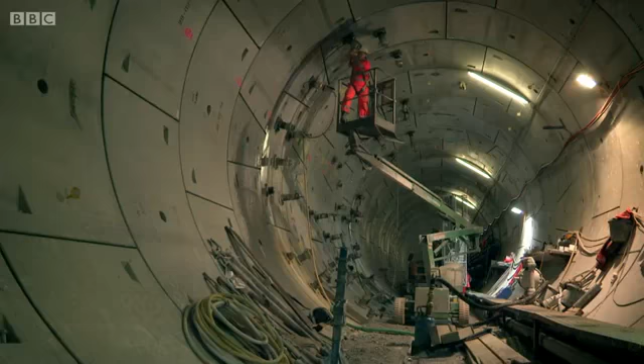Underneath the streets of London, an army of more than 10,000 engineers is building a brand new subterranean railway. Okay. Crossrail. We've done the maths, we've checked the maths, and we've checked them a third time. Costing almost £15 billion, it's one of the most ambitious rail projects in Britain since the time of Brunel.

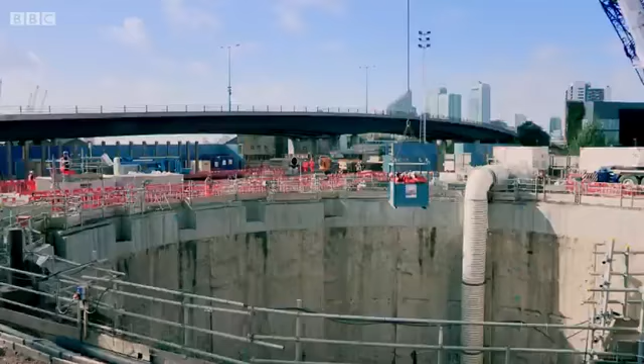I've been doing civil engineering for 35 or so years. Even I can't appreciate the scale until I come down here. Head him up. It was a lot easier when I was about 5 years young and 2 stone lighter. This is a crucial stage of the project for workers digging 42 kilometres of tunnels. We only get one chance to build this tunnel, so we have to get it right.

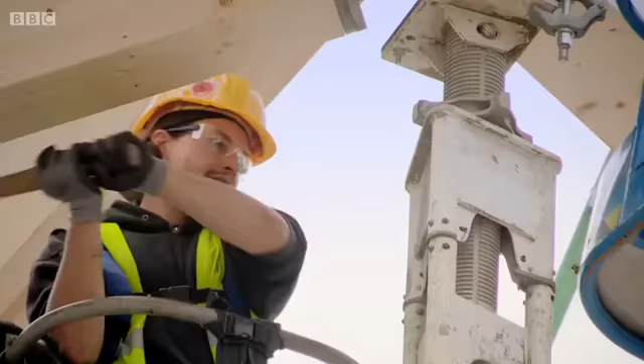When you do these things, you're building a part of history, you know, it's going to be here for a couple of 100 years. And constructing 10 vast new stations. I've never built a train station before, never mind one in a dock underwater. For almost 2 years, cameras have been following crews, working cheek by jowl with some of London's most distinguished residents. Bus ready to start pumping?

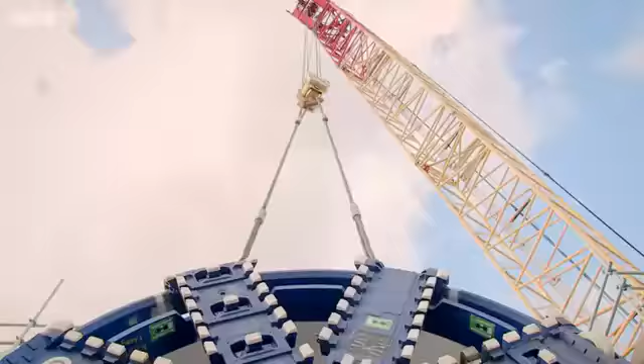Facing a constant battle to keep London moving. This area is where the gridlock is. Haven't been able to go up and down these streets for 4 years. Is Crossrail essential? Be wonderful when it's done. Constructing Crossrail is like undertaking open heart surgery on a patient whilst that patient is awake. This is the exclusive inside story of the epic endeavour to build London's new Underground.

London, home to more than 8 million people. The key to keeping everyone moving, the Tube. A vast network of 270 stations and 250 miles of track. The London Underground handles more than 1 billion journeys a year. All you've got to do is go on the Underground system in the morning and you can see it's very crowded. The forecast for London is one of continued growth, an extra 1 million more people in the next 10 or 15 years.

This 150-year-old network struggles to cope with peak demand. The last new tube, the Jubilee line, was opened 35 years ago. So today, engineers are building a brand new underground railway line to help take the strain. Passing right across London, it's called Crossrail. It will run overground, from Reading and Heathrow in the west,

straight underneath central London. It will connect key mainline train stations with the historic Square Mile and the new business district, before terminating at Shenfield and Abbey Wood in the east. 120 kilometres of railway will link to the rest of the Tube and open in 2018. Heathrow, Europe's busiest airport, will be just 28 minutes from London's West End, a journey that currently takes almost an hour on the Tube. Another 8 minutes will whisk you to the booming East End.

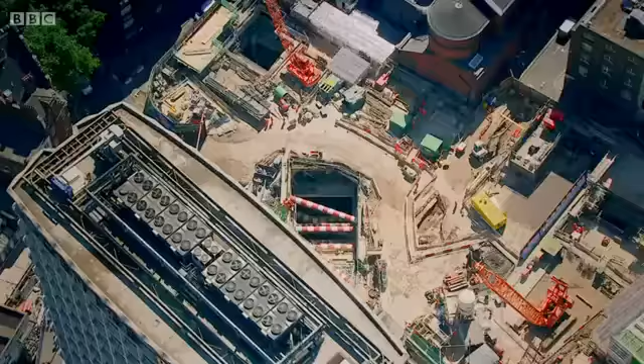An idea born in 1974, it's taken 40 years to get to this point. And the project isn't without controversy. It is a big job, probably the biggest single rail project that the UK's ever seen. Pretty much everything we do has an impact on somebody. The budget for Crossrail is 14.8 billion. This is taxpayers' money. It's important to remember that. And the other thing I've got to sign here is a £21 million payment authorisation to one of our tunnelling contractors. And this one's okay.

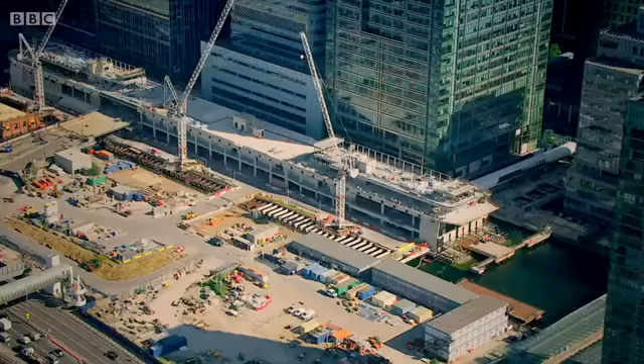Building Crossrail in the middle of nowhere would be a big enough technical challenge, but to do that right in the centre of London with all of the neighbours above us and around us makes it more complex still. Oxford Street, the shopping mecca that runs through the heart of London, between Marble Arch and Tottenham Court Road. It's the busiest shopping street in Europe. 200 million people visit the high-end stores here each year.

Engineers must dig the tunnels for Crossrail right underneath this area. The new train line will soon make it easier for people to travel here. But building the tunnels below ground without disrupting the stores and shoppers above is no simple task. Even for tunnel construction manager Steve Parker. Hey Mario. Who has more than 25 years tunnelling experience. Oh well, another glorious day at work.

A lot of people will say that tunnelling is boring. If you look up in the Yellow Pages boring, it says see civil engineers. I am a civil engineer. Steve is part of a 500-strong team. And this is the great picture at the Royal Oak Portal. And there's our tunnelling team. A few Hollywood players in there, yes.

Willie, where are you on this? Come on. There you are. Oh, he's right in the middle. That's Willie Archibald, our tunnel surveyor. And he's got a certain height, and we use that as a unit of measure. 1 Willie Archibald is a standard tunnelling unit of measure. We've got the Willie hat here from the Where's Wally thing, and we move that around from time to time.

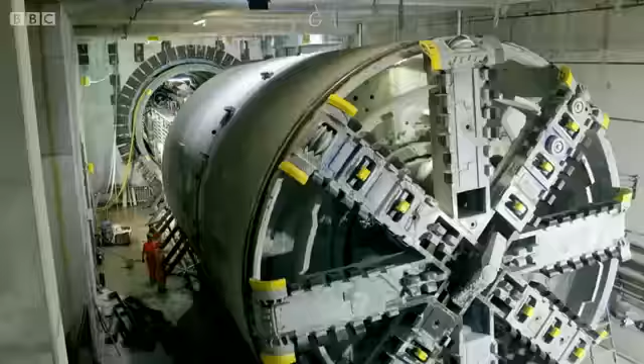Steve, Willie and the team oversee the running of 2 giant tunnel boring machines, TBMs. In all, there are 8 of these clay-eating monsters. Each one is 150 meters long and weighs 1,000 tons. These digging demons can burrow up to 72 meters a day.

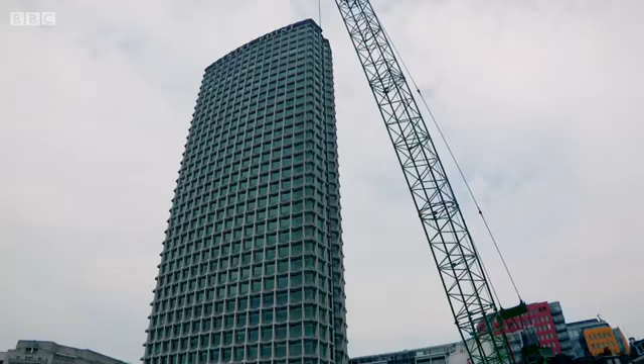And in the future, I want to be taking my family in this tunnel and say, look, I worked on this. I think many tunnellers like to think of themselves as kind of the unsung heroes because it's all underground. Steve's crew is about to face its toughest test yet. They must weave one of the tunnelling machines through the tightest point of the entire route, known as the Eye of the Needle.

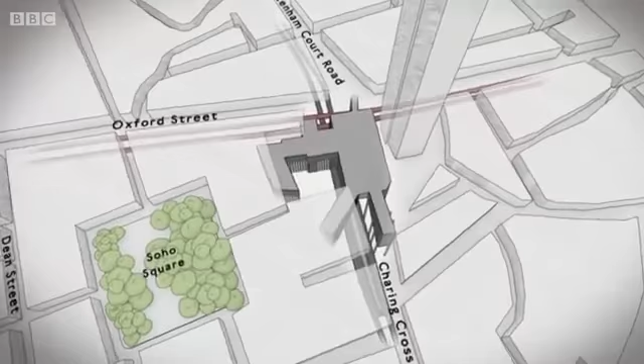At the east end of Oxford Street lies London Underground's Tottenham Court Road station. It's where the Tube's Northern Line and Central Line intersect. Crossrail needs to link into this super hub. But digging tunnels here is not easy. Pipes, cables and sewers crowd the ground. The Tube's busy Northern Line platforms and 2 escalators make the earth extremely crowded.

The only option for Steve's team is to drive their tunnelling machine through the tightest of gaps, 85 centimetres above a live running tube line and 35 centimetres below the escalators. It's the closest any Crossrail tunnel will come to the critical infrastructure that keeps London ticking. At the controls for the tightest drive of them all is shift engineer Ed Batty.

We've been in tricky spots before, but nothing where we've had something below us and above us and in such a close proximity. So yeah, it's a first for me. My first job on a TBM, and this is 1 year and 1 month I've been down here. You know, the first 6 months was a learning curve, and now I know what the crack is basically.

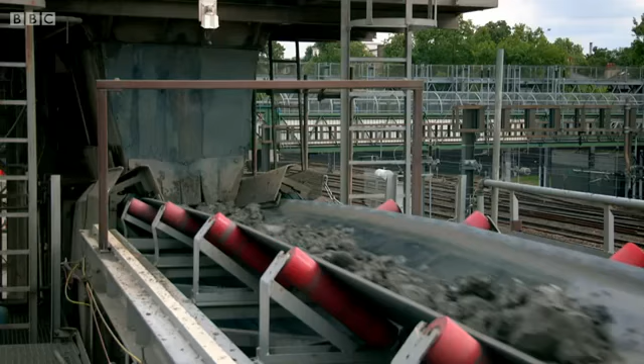What's going on now? That's the TBM belt just about to start, and that's the belt that goes all the way out. 4 kilometres of conveyor belt transport the excavated London clay out to the surface. By the end of the project, the tunnelling machines will have mined over 6 million tonnes of earth, enough to fill Wembley Stadium 3 times.

Hey guys, lovely morning. Steve and the team are meeting with London Underground. We need to make sure that the parameters are absolutely clear so that we avoid some sort of unnecessary response. The tunnellers can't interrupt tube services during the 48 hours it will take their machine to pass through the Eye of the Needle. The tunnel boring machine is passing directly over a platform tunnel, so our customers will be able to see the impact of the tunnel boring machine passing by.

For example, you could have tiles falling off. If we had customers on the platform who started seeing a lot of fluid come in, they might cause a panic. If the worst comes to the worst, we might have to evacuate the station. The only thing we've got to bottom out is what surveillance regime we're going to have in place. The team agree to keep a close eye on the platform as the tunnellers pass overhead. I suppose the real excitement, if you like, or the adrenaline will start if there is an incident.

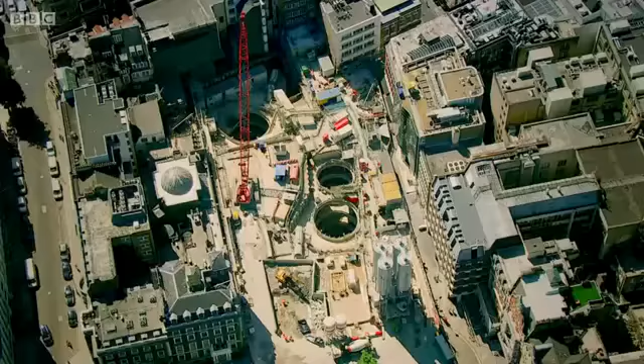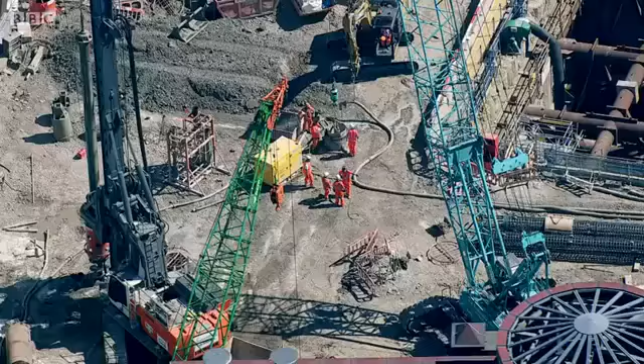Crossrail engineers have 40 sprawling work sites spread out across London. Some are little more than shafts allowing access to the new train tunnels growing underground. Others are giant holes puncturing the landscape, forming the outlines of 10 new stations. The sites in central London are hemmed in between office blocks, busy shops, and roads that never stop. This makes construction work extra difficult.

One of the pinch points is 2 stops east of Tottenham Court Road, the site for a new Crossrail station serving Liverpool Street. In 4 years' time, this will be a spacious new ticket hall. But right now, there's almost no room for manoeuvre. We'll get cracking then, yeah? Right! An elite squad of crane riggers is assembling to clear some space.

Right, this is my team. I'll be working with it. This is Gurge from down here, so he knows the area. And this is the Scouser, Lee.

You've probably seen him on Crime Watch. Oh, cheers, Steve. I'll never be welcome in Liverpool again, will I? Well, I love my van, laptop, kitchen sink. It's all in here somewhere. And I try and keep it really tidy. Everybody takes a mick because it's such a tidy van. Polishes that every day. When he gets home, he gives himself another hour on the timesheet, gives his van a good polish.

At 7 years in the army, that's what it is. You're either tidy or you're in a lot of trouble, like.

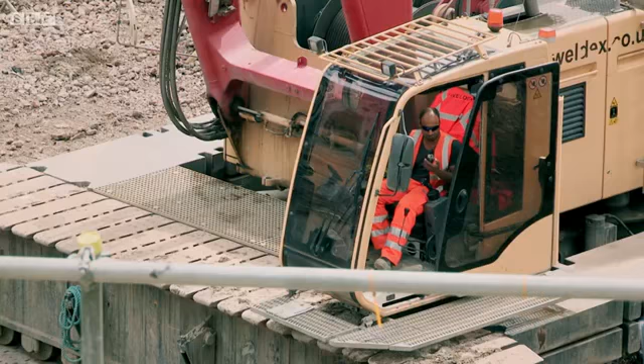The huge 280-ton crawler crane has been hauling heavy equipment around the site. Steve leads the team, tasked with lifting it from the cramped space so building work can begin. The lifting of the crane out of the hole, it's not something you do every day. I've been doing it 15 years now. I suppose it's never easy, like.

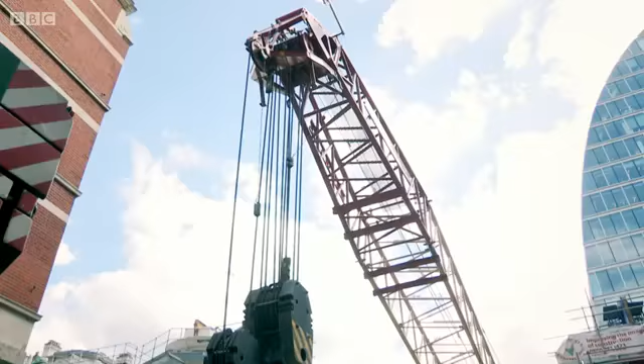The crane is so huge and the site so small that first they need to close off a side street to lay its 60-metre-long boom arm down. Put the rest of the barriers in. Keep booming it down, mate. Keep booming it down. Nice and steady. And hold it there, stop. Just watch yourself, because that's going to slam that way. Hold it there, Norbert.

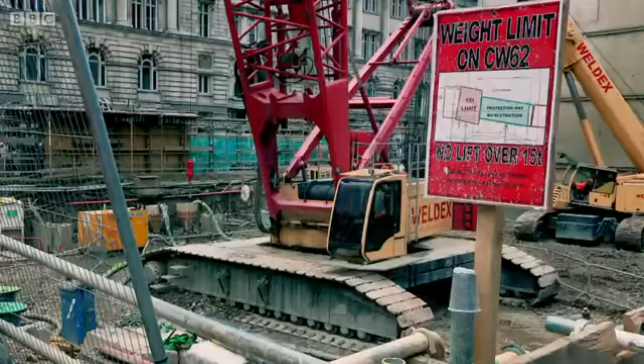Steve now needs to bring in a big mobile crane to dismantle the rest of the crawler. The obvious place to position this is the empty narrow strip on site, from where it can easily lift out the crawler crane. But the world's oldest underground railway, the Metropolitan Line, runs less than 2 meters below the surface. Putting the crane here could damage the Victorian tunnels.

So the team has no option but to position their crane on Moorgate, closing off one of London's major traffic arteries. Moorgate is an essential thoroughfare into the heart of the historic business district. Over 400,000 people work in the city during the week. But at the weekend, it's relatively quiet. We're going to be slinging you in through the head there. Once they close Moorgate tonight, Steve's team have just a single weekend to get the crawler crane off-site.

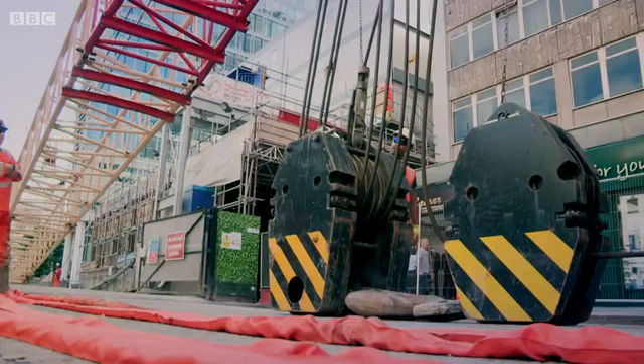This part of London has always been busy. When Victorian engineers built the Metropolitan line in the 1860s, they closed streets for years. Cutting huge trenches into the ground to form tube tunnels caused major disruption. Steve can't afford to cause gridlock here today. He needs everything to run like clockwork.

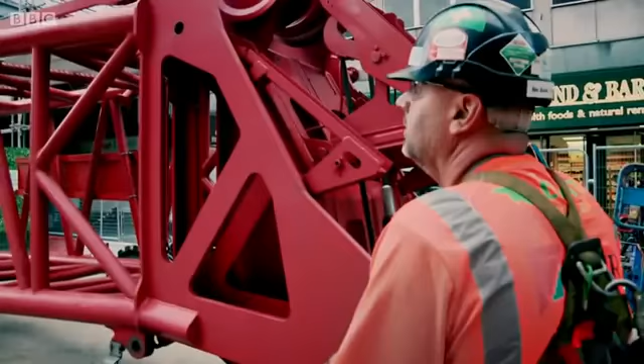Yeah, it was a lot easier when I was about 5 years younger and 2 stone lighter.

In the heart of the West End, Crossrail's new station at Tottenham Court Road will be a gateway to the shops of Oxford Street, as well as the vibrant area of Soho. Soho is London's entertainment hub, home to hundreds of bars, restaurants, and the West End's famous theatres. Here we are in the middle of Soho Square. Crossrail is building a new station directly underneath our feet here. Our tunnel boring machine is directly under this building opposite us there.

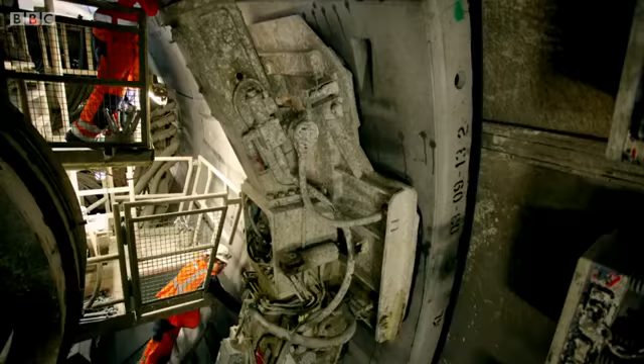Advancing on average 22 metres a day, Crossrail's vast tunnel boring machine is closing in on the eye of the needle. We've got to pass under a couple of buildings before it gets to the eye of the needle. But before we get there, obviously we've got to protect the buildings. We don't want to put the table tennis table out of level. It's all part of keeping London moving.

Digging directly under a city is a delicate operation. The loose ground around freshly dug tunnels could settle unevenly, potentially causing buildings to tilt. So Crossrail's engineers use a network of lasers and targets to spot any movement of buildings.

If you look closely on the buildings, you can see lines of these prisms that are all across the facades. On the far corner there, on the brackets away from the building, you can see an automatic station up on the end there. It will know where these prisms are supposed to be. It will turn the instrument to see where it last read the prism from, and then it will take the shot that will give it the exact location of the prism. You'll see it rotating around now, working its way around, and then sending all that data back to the control room, so we know where all these prisms are in real time.

Data from thousands of targets installed across central London flows back to tunnel control. Simon Levy analyses any slight change in ground level picked up by the instruments. If the ground moves either up or down, we can tell from these graphs. The nodes on the points are blue, so that means they're not in any trigger area. But if they go to a green, it's a green alert, amber and red.

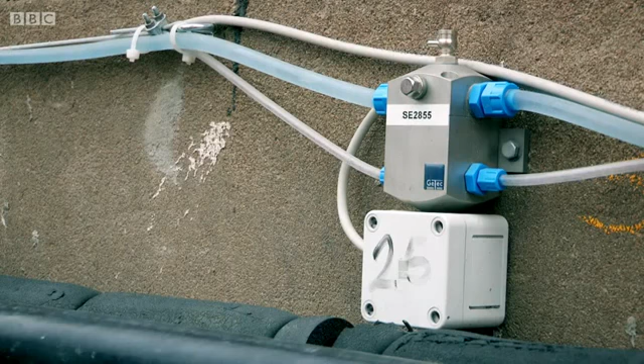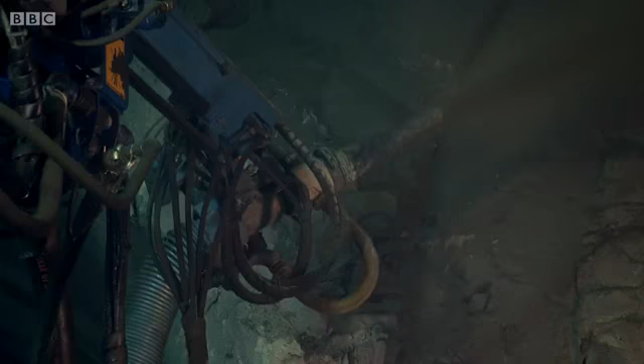The House of St Barnabas is bristling with gadgets. But despite supporting its stairway and protecting its pillars, there's a problem. As engineers dig passages beneath Soho Square, to link up Tottenham Court Road's 2 new platforms, the excavations are disturbing the ground. In Soho Square now we have some amber triggers on the levelling points. It's not to do with the TBM, it's the new ticket hall. So they're actually excavating fairly deep in that area.

Sensors on the House of St Barnabas have triggered alerts. Reverend Scott fears cracks in his plasterwork are getting worse. The corner behind me has been gently moving towards the square. And we are watching the cracks that are forming in the plasterwork. Now, we don't want to be panicky about this, but you have to keep an eye on what's going on. The main thing is to try to ensure that it all stays up there.

The Reverend isn't the only Soho resident worried about the impact of Crossrail's construction work here. The Star Cafe was started in 1933 by my father. I personally have only been here 52 years. So, yeah, got a bit more to go yet.

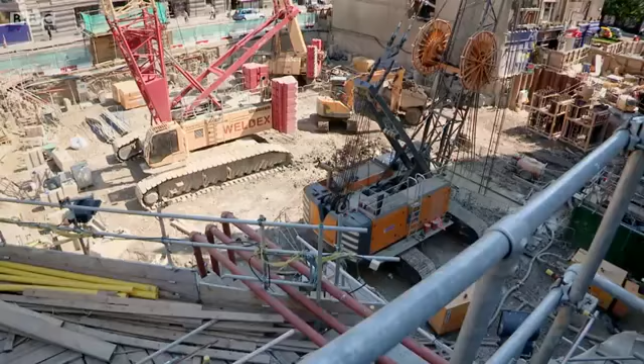2 stops back east at Liverpool Street, the fight for space on the cramped site has forced the team to close off a side street to break up a huge crane. What we're going to do now, we're going to split the top 2 pins of the boom now and lay it down on the floor, and we'll knock it to bits.

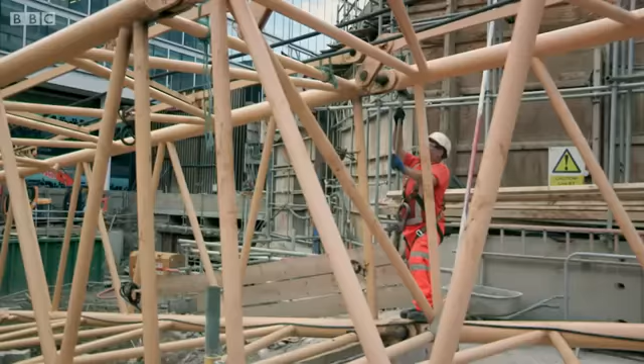Oh. To be in my type of position, a good back and knees, and good with a hammer normally helps as well. That's it. Yeah, it's knackered. I'll get my paint. Obviously, when you take a crane to bits, you've got to examine it for any damage, any defects and that, so it's safe for the next job. I'll mark it down, obviously. Someone will get a bill somewhere for it, because they're not cheap. I'll do my tag. It's damaged, but it's perfectly safe to work still.

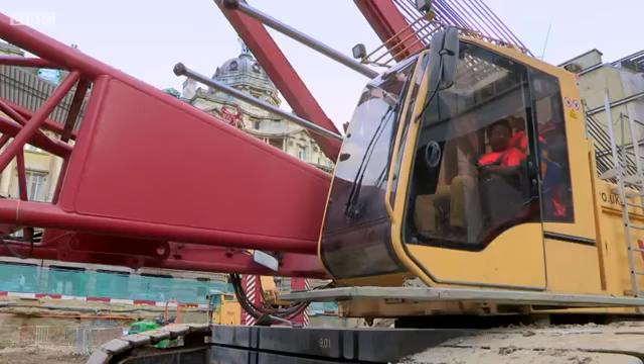Right, we'll go for the main rope now, Norbert. Norbert's my crane driver. Where's he? He's in the crane, and he loves his crane, so he's sat in there with his air conditioning and his newspaper and his dirty books, whatever else crane drivers read all day. Right, we'll get these pins out.

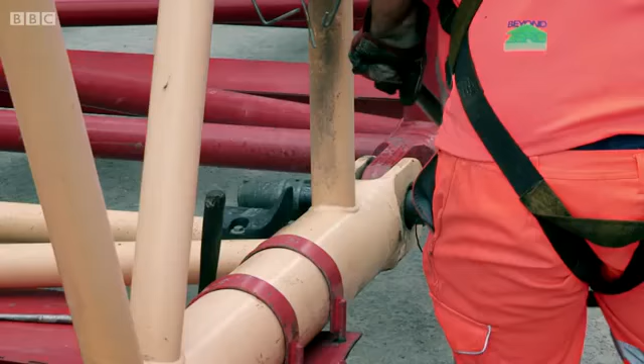These 4 here. Are they the damaged pieces? Yeah, they're damaged. They'll have to be replaced. It's the brightest colour we could get, bright pink. Look at that, Bobby Dazzler. Isn't it?

Once we're happy and the lights go red, we'll close the north side off, both lanes. With the boom arm down, Steve's ready to get a mobile crane into place on the road to lift out the rest of the crawler. It's time to shut down Moorgate. Okay, mate, as soon as it's red, mate, and it's safe to do so, go for it. That taxi's your last one, mate, as soon as that taxi's out. Moorgate is now closed. The team only has the weekend to break down and remove the crawler crane before the road must reopen for the Monday morning rush hour.

But there's a hitch with the 350-ton mobile crane they're calling in to lift out the crawler. I don't know if you've heard about the crane. I haven't. Well, I've just had a heads up, but... Yeah, the 350-ton crane has got damaged on another site. It won't be coming here. Okay. There are only 2 of those 350-ton cranes in the UK at the moment. One of them's committed on another job and couldn't be released, and the other one's been damaged, so here we are trying to replan.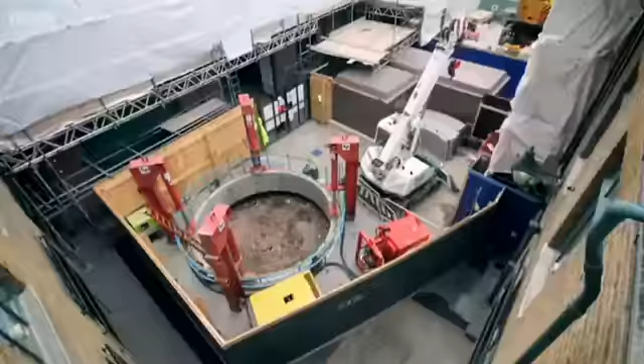Before works began, they created a vast subterranean protection system. They dug 22 unique shafts around central London to protect historic buildings. 4 of these shafts are in Soho Square. A spider's web of thin tubes stretches out from each shaft. Each tube has holes every metre.

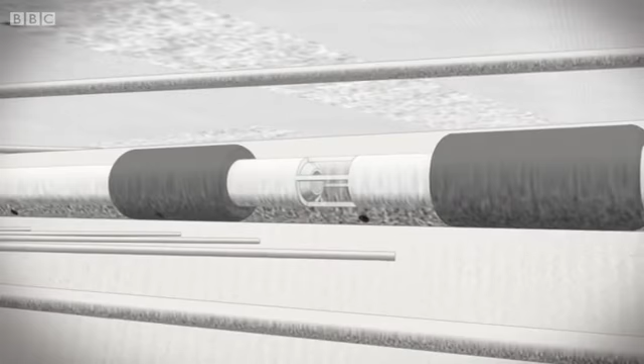Engineers send a special device called a packer to the spot where the ground is settling. The packer precision injects grout to fill up any voids, lifting the earth back to its original position, protecting plasterwork, preventing further cracks and keeping buildings like the House of St Barnabas safe.

Tube number 46 then, yeah? This shaft in the southeast corner of Soho Square is the office for grouters Lloyd and Tony. This is what we call a packer. This rubber part here will inflate. That'll form a seal to prevent any grout coming back out. 90 metres, long way to push the packer, but you take the rough with the smooth, I think. 2615. Okay, 2615.

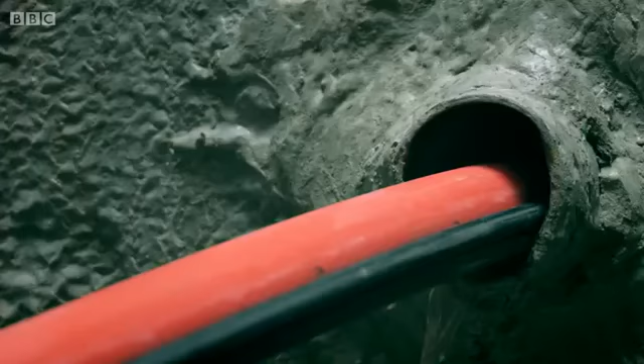Lloyd and Tony spend up to 12 hours a day down this shaft, packing holes under Soho Square. Okay, that's depth, guy. Inflate the packer. That's ready to start pumping. Yeah, pumping out.

I've been on the job for about 16 months. Tony's been with us for about 6 months. We generally tend to stick together as a team as well, you know. Yeah, we do. I mean, not too close, obviously. You don't want to get too close in a place like this. You get used to talking to yourself, but apart from that, it's all right. Okay, up on the reel. Whoa.

Now we're off to Crossrail in their new offices, and we usually meet with them regularly to survey the monitoring, to discuss any particular operations that are taking place, and then we can coordinate. Welcome to the House of Barnabas periodic meeting. The team will meet once a month for the next 4 years to keep check on Soho's historic buildings. I did report that everything's fine. Yeah. And then the summary sheet won't have any triggers, unless we get real ones.

They'll keep a close eye on the House of St Barnabas and its exquisite Rococo plasterwork. The charming lady here has survived to keep us entertained in the 21st century, and I hope for many more.

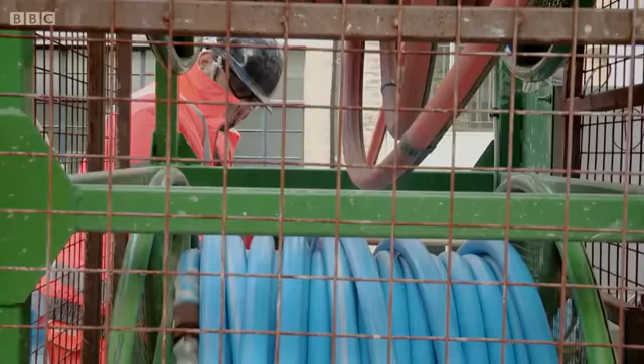We've established a network of grout shafts, and by doing that we can physically lift whole buildings, the whole area if need be, and we can make sure there's no damage to any buildings. Building grout shafts in the congested heart of London's swankiest district solves one problem, but means compromises must be made. This shaft sits right next door to Bonhams, a fine art auctioneers established over 200 years ago.

Lot number 36, ladies and gentlemen, the splendid Imperial vase. Start the bidding here at £400,000. 400,000 is offered, or 20. As you can see, it's a very tight site here. There's very little room. And you can see how close Bonhams building is. It's only a metre or so away from the edge of our grout shaft.

£700,000. 750. 800. 850. Attending an auction is incredibly exciting. I've been in the business for 30-odd years, and yeah, your adrenaline goes. It's an exciting spectacle, if you like. It is like putting on a show. £1 million. There's the bid. 1,250,000 I'll take. Quite sure, no more for you. I'm selling for £1,250,000. All done.

The priceless, the fragile, the unique. Items for sale must be carefully exhibited in Bonhams gallery. We've got a very special sale coming up where we're going to have about 14 select motor cars. The sale content value is around about £13–14 million. James needs to get 14 vintage cars through Bonhams back alley and into the showroom for sale.

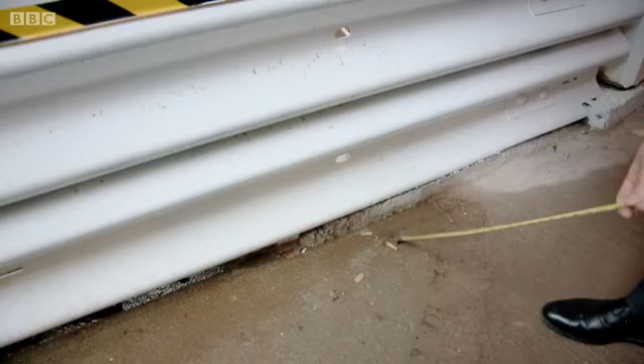So this is the pinch point here. 230 centimetres, but realistically you've got about 210 centimetres with a little bit of contingency either side. The slightest scratch is going to affect them visually and affect their value as well. On paper it works, but we all know that on paper is not necessarily what it's like in reality.

Across town, in London's financial heart, lift supervisor Steve is fueling up for the day ahead.

Yeah, you can't beat a good cup of coffee in the morning, can you? Bit expensive down here, though. Well, up north, I could get about 4 cups a night out with me whippets, maybe buy a couple of pigeons, and still have a tanner left. Right, lads, come on then.

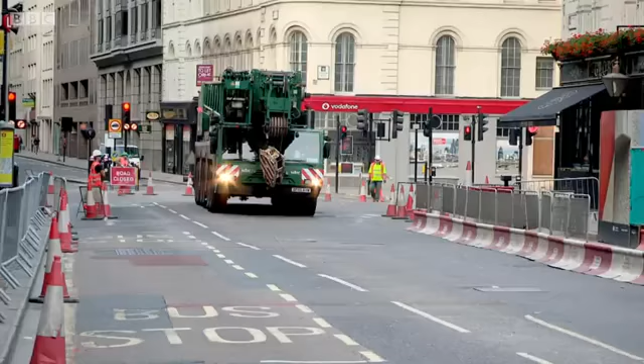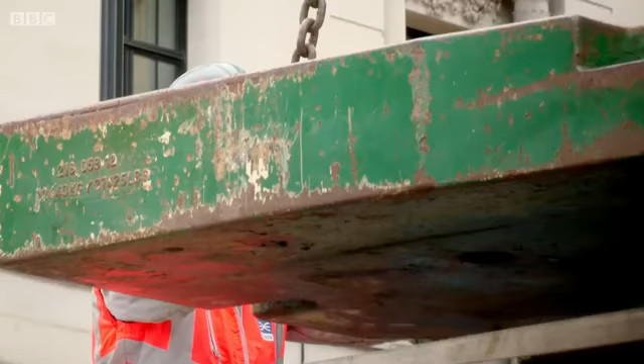The crane originally booked for this lift has been damaged on another site. They've hired in the biggest replacement they could find, but it might not be big enough. Crane's turned up, but he's only got 52 tonnes of ballast with him, which is adequate to do all but the last lift. Without enough ballast to stabilise the mobile crane, the heavy load could cause it to topple. Steve's team must source extra ballast for the biggest lift, fast.

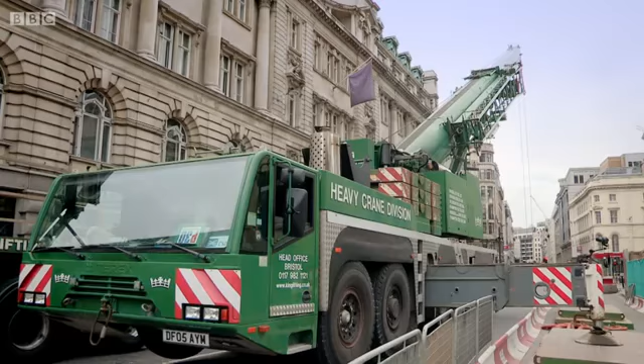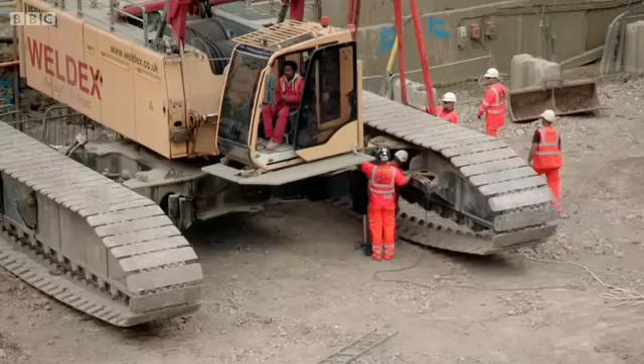Obviously what he's got on now isn't sufficient for the heavier lifts later on in the day, but it's good enough for what we've got to load out this morning. Start taking her up, mate, we'll get it over the section. All the way. The team make headway, hauling the lighter parts of the crawler off-site. Right then, mate, start taking her up. Leaving the 44-ton base section until last. That's lovely, that, mate, no bother.

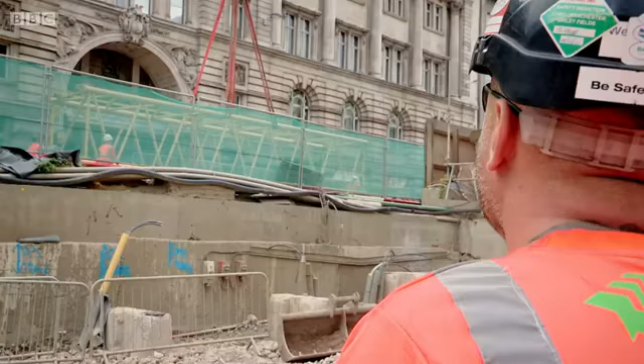You just got to be careful of the buildings, people walking underneath. The heaviest load we've got today is the car body of the crane. It's 44 tonnes. All up, we need the full 96 tonnes of ballast on the crane to lift that. They urgently need the extra ballast to arrive on site, to finish the job and reopen Moorgate in time for the Monday morning rush hour.

Crossrail's road closures in the city are a bane for motorists, especially London's 23,000 cab drivers. Cabbies moan about everything. But you've got to have a good moan if you want to live in London. Mike Zini has been a cab driver for 12 years. Crossrail's just made all the roads rotten. This area is where the gridlock is. Haven't been able to go up and down these streets for 4 years.

You can't do the rat runs anymore, so they've messed up what we call the Dirty Dozen. Dozen streets that get you through the north part of Soho to get out of it. They're like little arteries into a heart. One or two of them start shutting, boom, boom, boom. I've seen cabbies pulling their hair out, foaming at the mouth, crying almost on the dashboard. You've got to keep your cool and just go with the flow. Don't get too stressed out about it all, because you'll just drive yourself mad. If you want to work in it, you've got to put up with it.

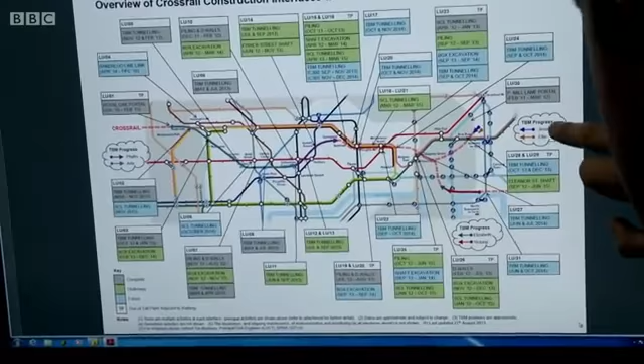There are 31 locations where Crossrail are doing something that has the potential to affect London Underground. It could be that they're digging a very large hole close to us. It could be that they are doing some demolition work, for example, near to our railway.

Each generation of engineers faces the same challenge, upgrading London's transport networks to keep the city moving. Back in the 60s, it was building the new Victoria line that threatened to clog vital arteries. 10.5 miles of route, 12 stations, 11 of them at intersections with one or more existing lines. And the biggest engineering enterprise is at Oxford Circus.

Oxford Circus is just a stone's throw away from Tim's office. We're standing on the junction of Oxford Street and Regent Street, probably one of the busiest interchanges in the whole of London, I would think. In 1963, engineers had to build a new ticket hall for Oxford Circus directly underneath this busy junction. It would take almost 5 years to construct, so instead of closing the road, they built a giant bridge across it to keep traffic moving while they dug underneath.

The intention was to erect the bridge in one long weekend, the August Bank Holiday weekend, 1963. The area took on a beleaguered look as D-Day came nearer. Buses rerouted and traffic diverted, policemen deployed and essential services endangered. And so zero hour arrived, 1:30 on the Saturday afternoon, and it was raining, of course.

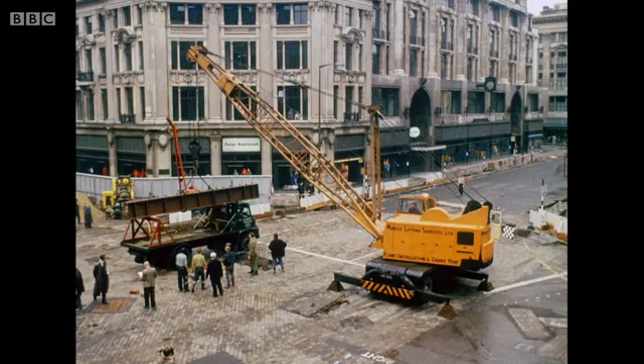Then the hardware started arriving. The largest of the girders was 35 feet long and weighed just over 5 tons. But the iron fighters were tossing them around as though this was the Braemar Games. There's no bolting down, which saved time and bolts, and they can't shift because the whole structure interlocks.

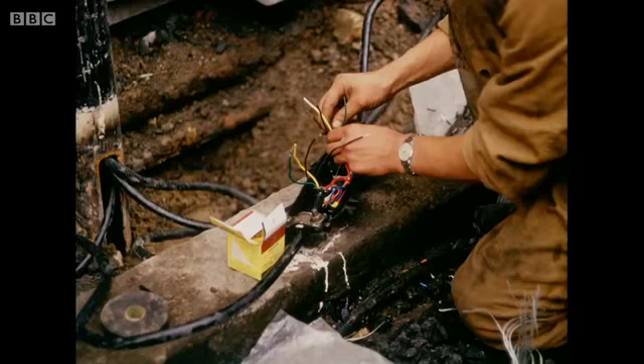So it went on for the rest of Sunday. And we were still waiting for the bit that didn't fit. There's something like 245 individual steel elements that were slowly assembled, and they got it right first time. And right on the dot, 6:30 a.m., Tuesday the 6th of August, 1963, with all services functioning, the first traffic crossed.

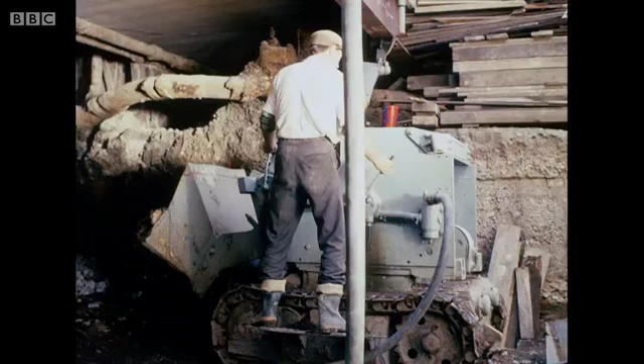Keeping the buses moving, keeping cars moving, and that's allowed them to be progressively excavating the soil below the circus itself. If we don't learn lessons from the past, we won't be able to do the more challenging projects of the future. So 50 years ago, almost to the day, we had this incredible feat of engineering, and 50 years later, we're about to send a tunnelling machine through a very congested part of Tottenham Court Road station.

There are now just 2 days to go before Crossrail's tunnelling machine goes through the eye of the needle. It's going to get a lot of attention from everybody. And we want to get it right. You know how expensive this photo shoot is? It's going to be a very close encounter.

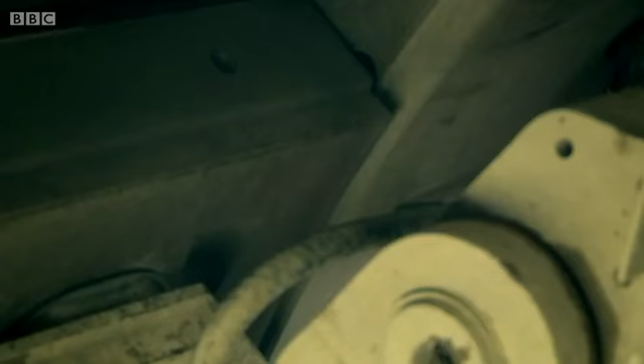If we actually hit the Northern Line platform, then London Underground would have to close the station. We've looked at where all the different structures are, and we've convinced ourselves that there is an eye that we can go through. There's just 5 centimetres margin for error as Willie lines up his tunnel boring machine with the eye of the needle. Yeah, okay.

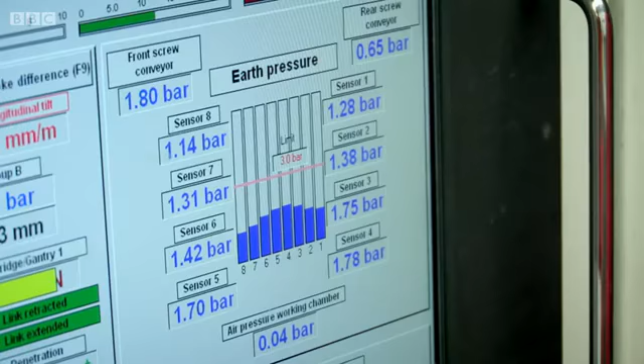His eyes and ears on board is graduate shift engineer Ed Batty. We're now in the TBM control cabin, and from this little room we can control all the systems on the machine. It's also where we control the navigation from as well. And the steering's here, basically. These represent the rams. There's 22 rams, these numbers. So if you want to go down, you put more pressure on the top.

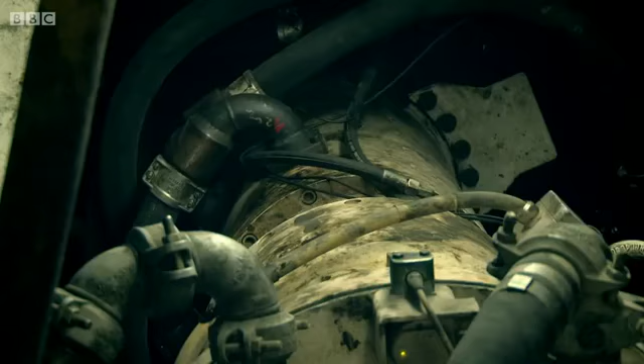Although the team can fine-tune the direction of their tunnel, as they pass through the eye of the needle, they need to be sure they're lined up precisely with the tunnel's intended route. We're coming up to the Northern Line and it's under a metre below us. That line will still be operating, so there's going to be your day-to-day commuters whizzing underneath us while we tunnel over the top, unnoticed. We'll even be able to hear the trains as we pass over. It's that close, and we only get one chance to build this tunnel, so we have to get it right.

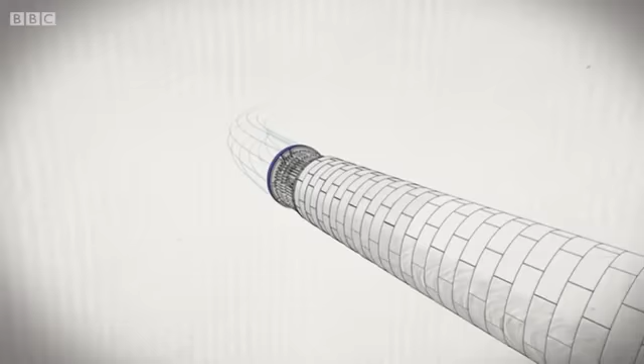The team must know exactly where they are at all times, and crucially, where they're headed. To guide them, they've rigged a clever device behind the head of the machine. It constantly fires a laser towards prisms in front and behind, telling them if they're staying on track or veering off course. They reposition this guiding light at each bend in the tunnel. This laser precision is critical to steering the tunnelling machine through the eye of the needle.

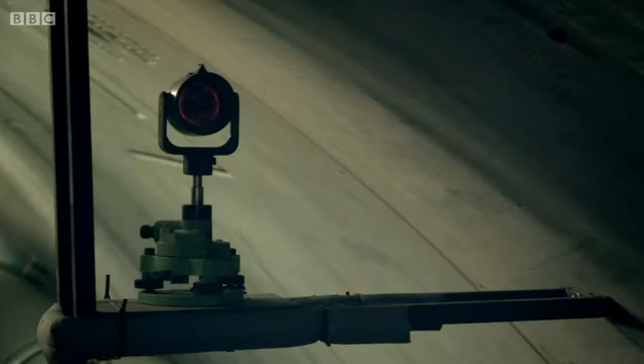So when we reach that position, we need to be super good at what we're doing. There's no room for error. We've got a series of targets in the tunnel. They keep being built as we build the rings. So this machine fires a laser at that position. It knows where it is.

If you're on a straight bit of tunnel, the laser can go quite a distance without hitting anything. If you imagine we're on a curve, we need to move this quite often. There's a team of surveyors that come down here, and their sole job is to make sure that bit of kit is in the right place and it's working accurately.

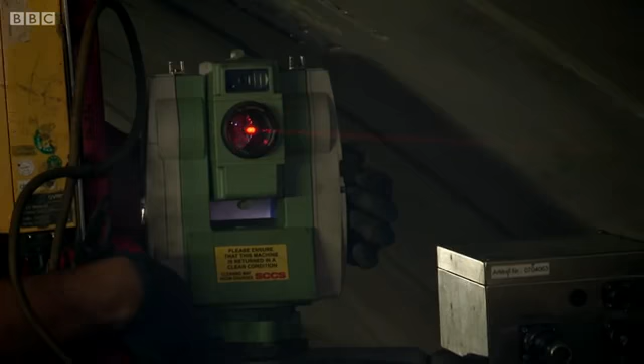Driver just constantly keeping an eye, make sure he's in the centre of the target and taking the machine forward. No steering wheel, but it's all done more like a computer game, if you like, where he's trying to keep the arrow in the centre of the target screen. We'll be in tight control, so what's going on in here will be very precise. We have to be absolutely spot on.

Cool. Yeah, okay. They use the lasers to line the tunnelling machine up to pass over the Northern Line platforms and under the escalators. This is the closest a machine of this size has ever got to an operational railway tunnel. It's tight, so it's going to be interesting the next 4 or 5 shifts. It's not far off, it's all getting very exciting now. One stop west, over at Bond Street.

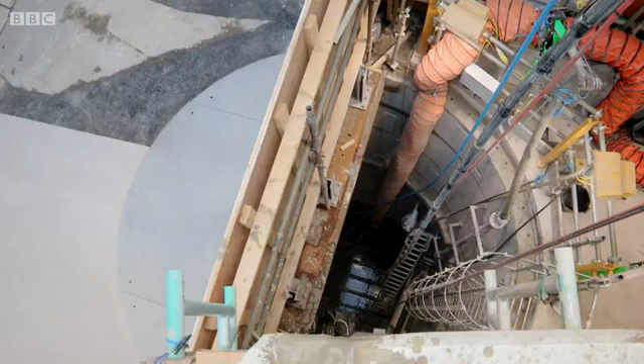We've got a layout of the plan of where the cars are going to get positioned. Crossrail's engineers have modified their grout shaft here, so Bonhams can get 14 vintage cars into their sale room for a multi-million-pound auction. It's the first time we've done something like this. We're going to bring them down in here into Haunch of Venison Yard, which, as you know, is the back entrance of Bonhams.

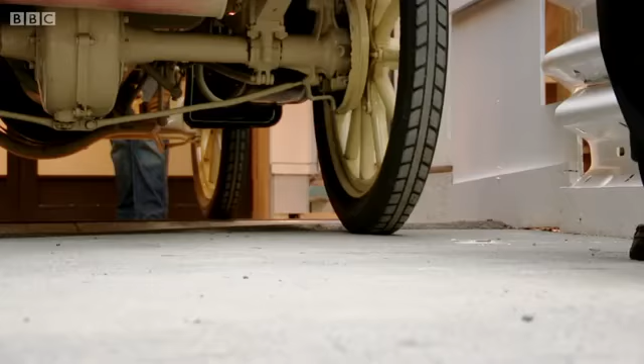This is the bit where we get very, very close to Crossrail. Anyway, we were going to use the cheapest car first off to see whether it worked, but anyway, we got a £300,000 Clement as a test case. It's a 1903 Clement Talbot that's 110 years old, and it's the oldest motor car in the sale. First one in, yes. So far, so good. We've got a one-car sale at the moment.

As you can see, we've got a bit of a Rolls-Royce traffic jam behind us. We've got a Rolls-Royce 20 horsepower, which is a car from the late 1920s. It's good, keep it like that. Straighten up, keep coming, keep coming, keep coming. Straight. And the Rolls-Royce Phantom 1. With a combined value of almost £1 million, the first three cars make it through the pinch point without a scratch. Very, very heavy. 2.5 tons.

You must have had your Weetabix this morning. Yeah, I did, yeah. Yeah, it's quite nice, that. Wouldn't mind it myself. Yeah, if I had a chauffeur, I suppose.

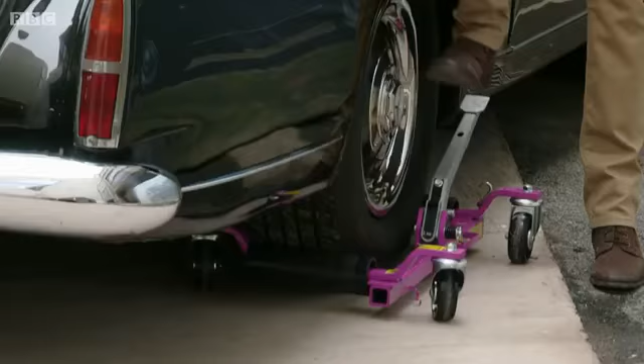What's your last go? 1, 2, 3. Very close. The Bentley S1 Fastback was the one that was most pressing on us with the width, where the Crossrail gantry is. In their day, they were the fastest four-seater motor cars on the planet, so they were really quite an important motor car. Okay, you're in. Jeez! Watch your back, here comes the Aston Martin DB6. Well, has it got brakes? The last few cars finally arrive.

It was a case of working with one another. You've got to suffer some pain for the gain. You can land at Heathrow and literally get to us at New Bond Street in an obscenely short amount of time. If Crossrail didn't undertake this construction here, we wouldn't see the benefit. After a quick polish, the vintage vehicles are ready to go under the hammer. They sell for the grand sum of almost £17 million.

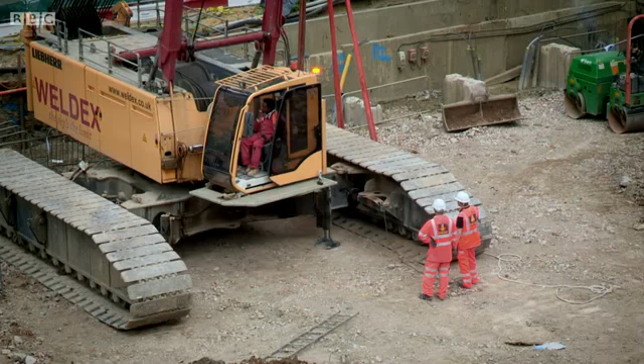Come on, Tubbsy. Let's get down. All right. Over at the Liverpool Street site, Steve's keeping a close eye on two teams this afternoon. We were winning 3-0 at half-time.

I've got a bit of a shrine to the team in the front of the van, like the mighty Wolverhampton Wanderers. That's me monkey, goes everywhere with me. He's done some miles, he has. He's a big Wolves supporter, and I'm a big Liverpool supporter. And he's very, very bitter over anyone else who's in the Premiership. The ladies see this badge in your front window and they just flock to it. They just can't help themselves. It's like a magnet for women. Yeah. Don't tell my missus.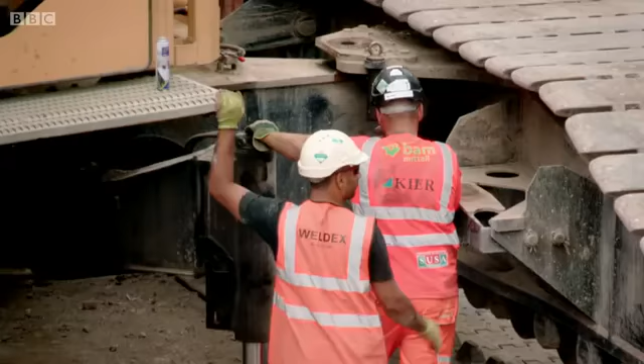The extra 44 tons of ballast finally arrives. Steve can now disconnect and lift out the two giant tracks. Everything's going tickety-boo. Look at that, thing of beauty. He just needs one more thing to go his way.

You'd have known if they'd have lost, because your phone would have been going like mad. Everyone else, you know, wouldn't they? Yeah. I'm in a good mood now. Wolves have won 4-0 today. What more can you ask for, eh? 4-0. Get in, my son.

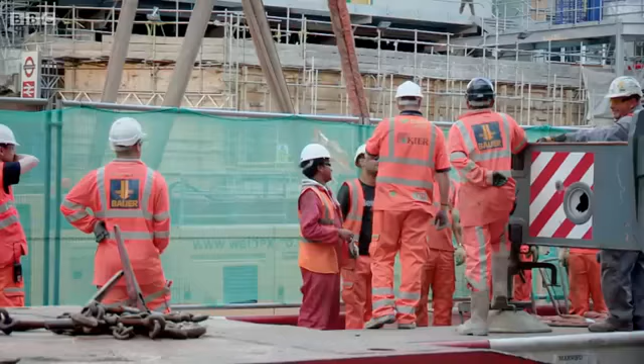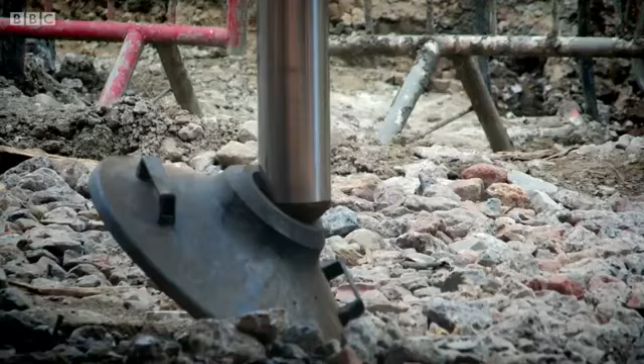The delays mean Steve can't start the biggest lift until the very end of the day. Right, you got the front end here just starting to come off the deck now. We might have to just inch it up to get over this cherry picker, mate, all right? Just pinch her up, mate, just so going over the top of that Heras fencing.

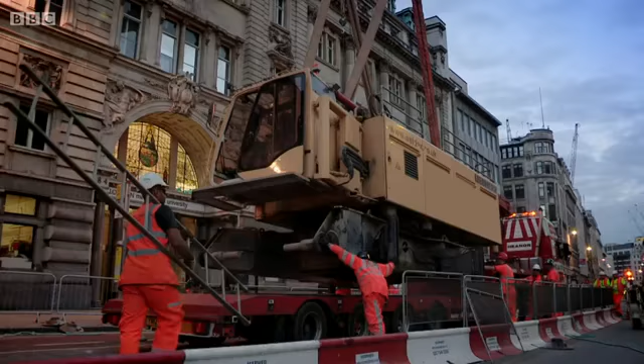Right, hand you over to them, lads, Nick, while I come up to the top. Whoa, whoa, whoa! Just hang fire there. Spot on, mate. Keep going down, keep going down. Weights off, Nick. Good man. Sound job, that, Nick. Beautiful.

All my lads are safe. No damage to any equipment. You can't ask more than that, can you?

And Wolves have won 4-0 today. Win here for all this and a win for Wolves. Cheers, lad. Thank you very much. High five, Lee. Oh. Come on, let's get up to north.

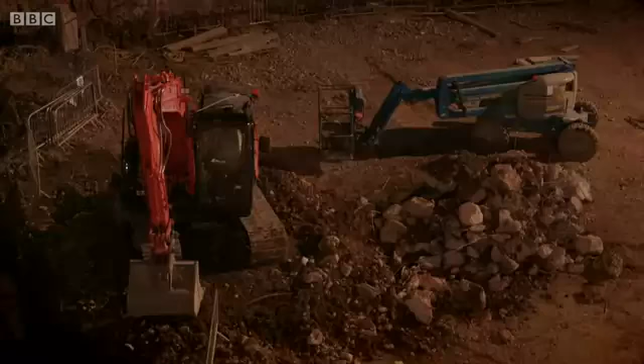With the site clear, work can now begin digging out the 40-metre deep hole that will form Liverpool Street Station's new ticket hall. In 4 years' time, it will be packed with up to 70,000 commuters each day.

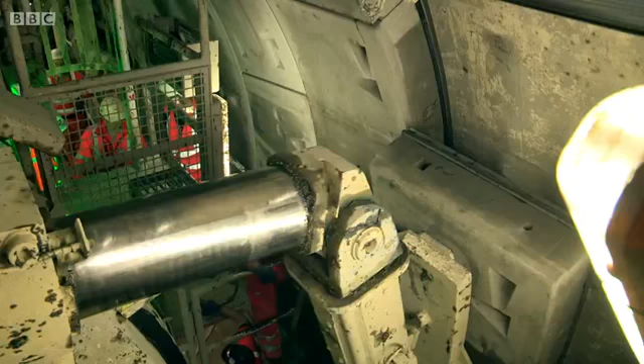Job done. The team can open Moorgate in time for the Monday morning rush hour. Right, Craig, I'm going to open my side now. Right, your first cars are coming through. At Tottenham Court Road, the 1,000-ton tunnel-building monster is finally entering the eye of the needle.

Welcome everyone to Sunday morning the 8th. This is the day Steve and Willie's team has been working towards. That's where we are. At the moment we're just touching the side of Charing Cross Road. We're under the site of the old Astoria Theatre, aren't we, Willie? Yeah. Today, the tunnel boring machine will reach the narrowest point of its route across London.

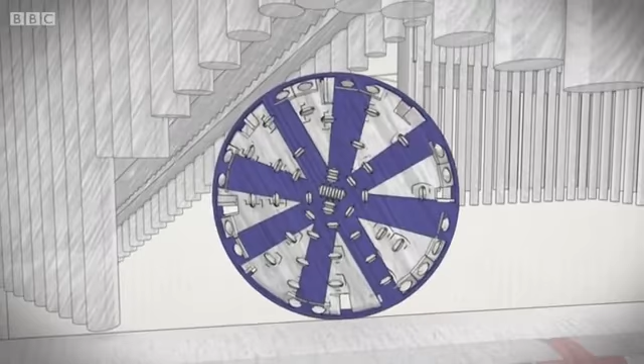So the crossing starts on backshift this afternoon, and I think we're going to be there. Yeah. Today's the critical day. It's the start of passing over the Northern Line, and so this is the critical point, the culmination of a lot of work over the last couple of months.

So people getting off the train in the next hour or so will not realise that above their head is a 1,000-ton, 7.1-metre diameter tunnelling machine. It's vital the crossing goes unnoticed, or passengers on the tube platform below could panic. General comment just to say be aware of proximity of LU assets. I would like Ed to keep an eye on the belt. Yeah, just extra vigilant.

So over the next 20 rings, we're directly above the Northern Line platform. Over the needle, yeah. We're just about to go through it. Hello. Ed. Hi Steve, how you doing? We've got one more ring to go before the cutterhead gets in line with the angle of the northbound line. Tim Morrison of LU said he was down this morning. He was there and he said he could hear the TBM and hear the miners.

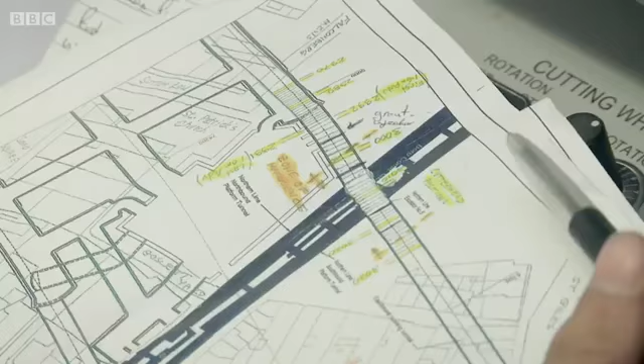We're that close, so you can actually hear what we're doing here. Yes, you could hear it. That was with no trains running. I mean, our one concern is that there are cracks within London Clay. Some of the water could ease out and find the simplest path of travel, which could be the big platform tunnel.

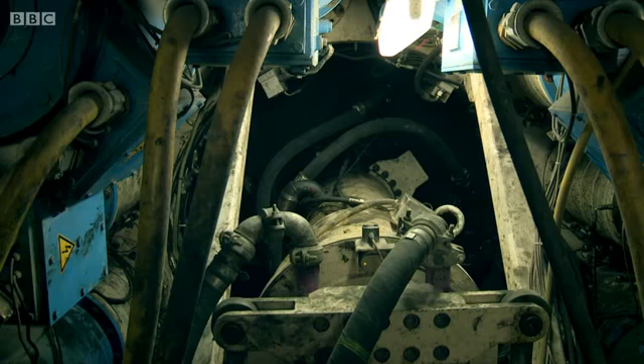TBM cutter is now directly above the Northern Line northbound station platform. So about 850 millimetres below my feet is the crown of their tunnel, so not a big distance at all. You see where there's a blockwork wall here just behind the tiled edge. That is pretty much the centre line where the tunnelling machine is actually crossing this structure.

Sam is one of the guys who's been based down on the platform. He's specifically looking for any fluid ingress from the tunnelling machine because that's something that we are concerned about as a possibility. The tunnel machine at the moment is quite literally above the tunnel crown. There is that apprehension because there is a small risk that we could see some ingress, so I guess that makes it more exciting.

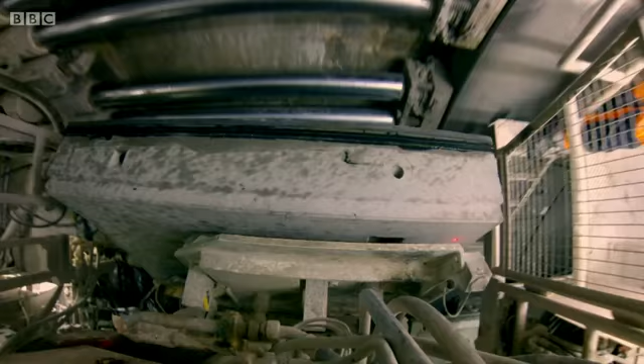With the tunnelling machine now inside the eye of the needle, the team must continue their vigil throughout the night. As London sleeps, the 150-metre-long earth-eating giant continues its relentless drive. Willie, got an update where we are? Yep. We're building 3024 just now. The team and machine make it through the tight spot.

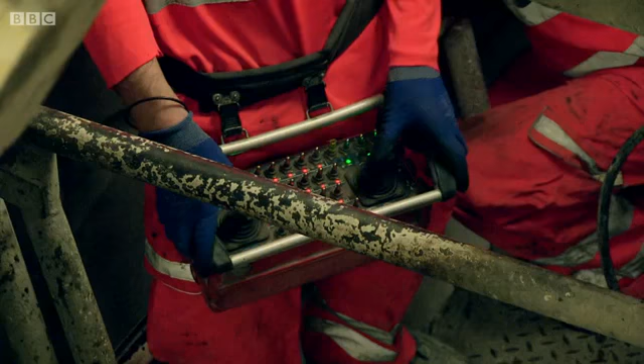Yeah, okay. No passengers panicked, no platforms evacuated. We passed over 2 platform tunnels with a 900-ton tunnelling machine. That's even the first, I think. Yes, it is, yeah. Cheers. The lads have been working down here really hard, and so have the guys up in the control room. A big relief. I'm chuffed that we've done it so well, and we've had such a good result.

We've done it, yeah. We've got through the tricky spot. The trains have kept running. Passengers haven't known that we've been there. But a great achievement, and I'm glad to be part of that too. The team leaves a perfectly formed tube tunnel in their wake.

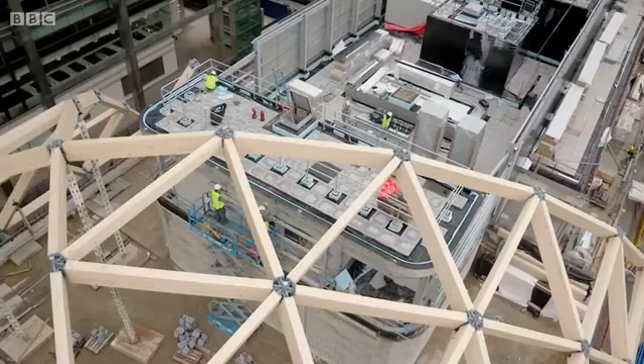There are still 2 huge jobs to complete. Finish digging the 42 kilometres of tunnels. You can't be normal if you go underground, can you? I mean, you're living in the bowels of the earth. And construct 10 new stations, each the size of a cathedral, before the trains can run. It's difficult to appreciate the scale of it. The station is designed to deal with 32,000 people per hour. It's absolutely huge.